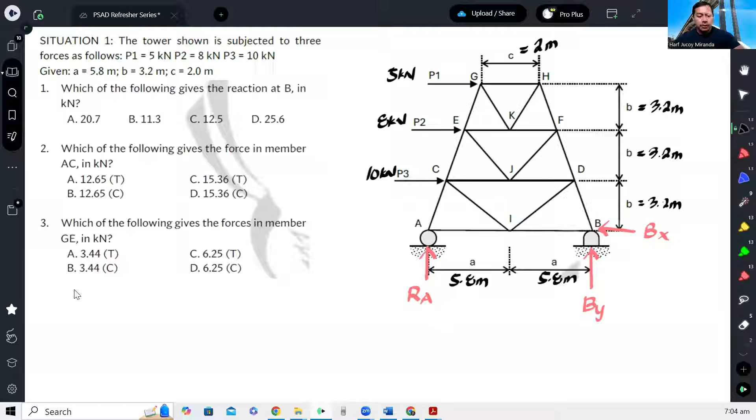Based on the whole structure, we can apply summation of moment at A equal to 0, assuming counterclockwise positive. So from A, we have 10 kilonewtons times B, rotation is clockwise, negative. And then also 8, rotation is clockwise, times 3.2 times 2, that is 6.4. And then we have 5 times 3.2 plus 3.2 plus 3.2, that gives us 9.6.

And then for BX, it has no rotation. For BY, it has rotation counterclockwise. So plus BY times 5.8 plus 5.8, that's 11.6. And that is all equal to 0. From here, we should be able to calculate for BY.

So we have 10 times 3.2 plus 8 times 6.4 plus 5 times 9.6, divided by 11.6. So that gives us a BY of 11.31.

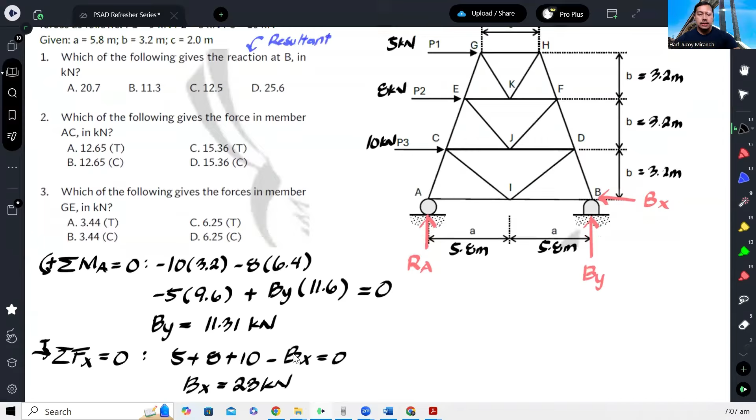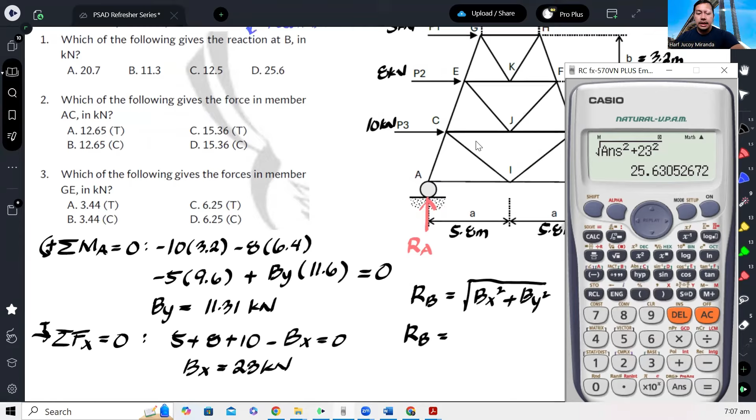So therefore, okay, we can now calculate the reaction at B. The reaction at B will be the resultant. So RB is just the square root of BX squared plus BY squared, and that gives us 25.63 kilonewtons.

Okay, hence the correct answer here is letter D.

Okay, next, which of the following gives the force in member AC? So let's find this. To calculate this, maybe the easiest way is to do method of joints at A. In total, only two members are attached there. Then let's solve first for RA.

So to solve for RA, again, using the whole structure, we will just take summation of forces Y equal to 0, assuming upward positive. So we will have RA plus BY, which is 11.31. BY is positive, meaning our assumption for its direction is correct. And then, I think that's it, nothing else. So therefore, the reaction at A would be negative 11.31 kilonewtons.

Okay, so meaning, our direction is reversed. So either you reverse this or you retain the direction and just keep it negative - either way works. And then from there, we can now apply the joint at A.

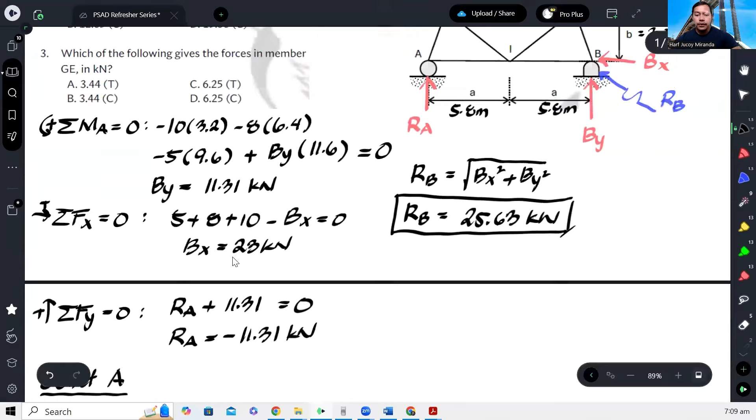So let's isolate the free body diagram of joint A. So this is joint A, it has here reaction RA. Again, I won't change it, but I'll retain it as negative 11.31. And then I'll assume this is tension - this is the force in AI. Then I'll also assume this is tension - this is the force in AC.

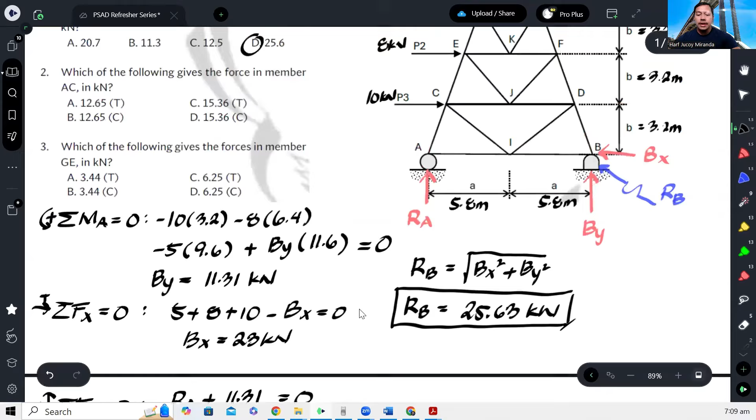So the goal here is to get either the slope or the angle.

So to calculate that, we can make use of this triangle. What I'll do here is just get the slope. To calculate this side, that is basically 5.8 minus half of C - isn't half of C equal to 1? So minus 1, that is just equal to 4.8. Then the height, I think that's pretty obvious, that's just the 3.2 times 3, which is 9.6. So meaning, the slope is 4.8 horizontal, 9.6 vertical. Let's place that here.

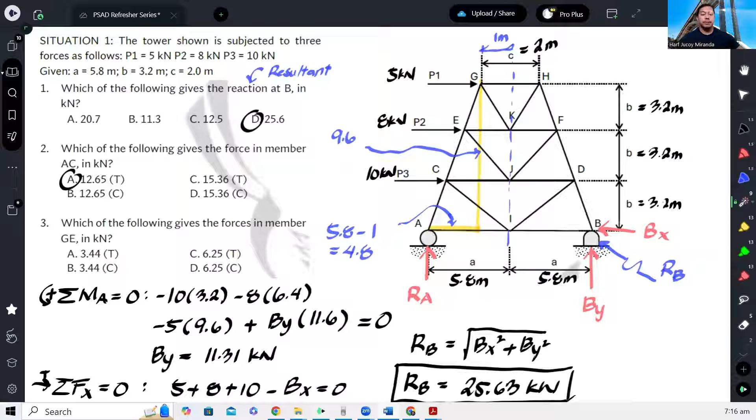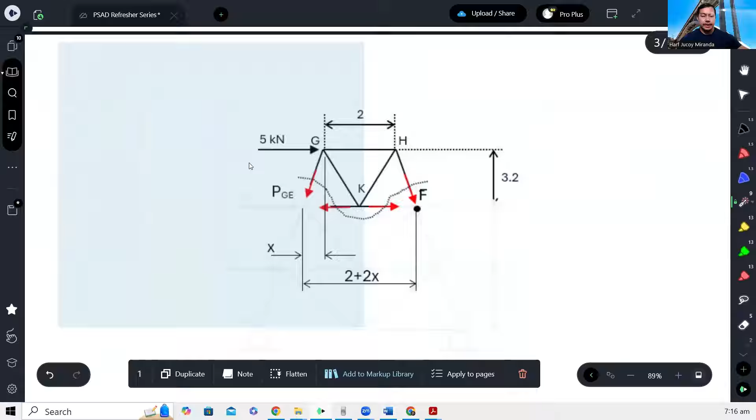So pag ginawa natin ng ganun, we will end up with this. And then i-isolate ko yung ibabaw. Kasi yung ibabaw, mas kakaunti yung mga force. So di ba pag nag-method of section tayo, it's much better to choose the side na konti yung force para hindi masyadong complicated. Okay? And then pagdating dito, we will just take summation of moment at F.

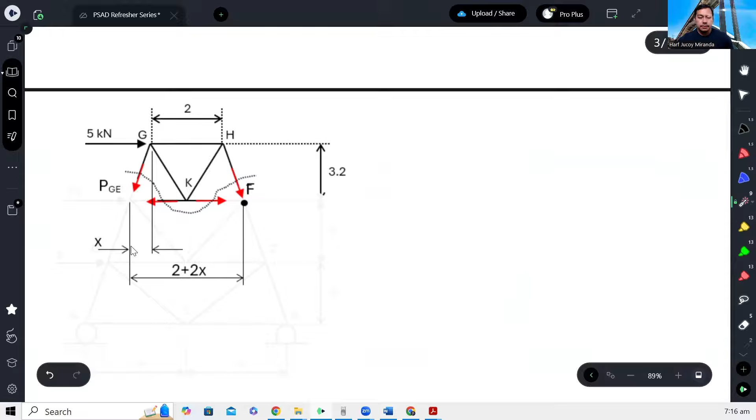But before that, we need to find this length. Kasi kailangan natin, pag nag-moment tayo, kailangan natin ng moment arm nito, no? So wala rin itong dito sa kabila. So kumbaga, ang ibig niya sabihin ganito: itong x na to, tsaka itong x na to, wala.

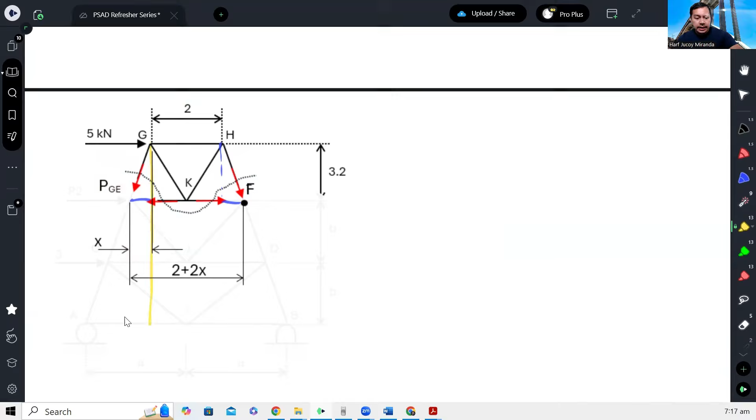So to solve for that, we will apply ratio and proportion, no? Remember from the original figure, meron tayong slope dito kanina. Yung slope dito kanina is 2 is to 1, 1 horizontal, 2 vertical. Okay? So therefore, we can just apply that and then take the ratio naman dito. So ito ay x, as ito ay 3.2. So therefore, we will have x is to 3.2, that's horizontal, vertical. And then, para sa malaking triangle, we have 1 is to 2. So therefore, x gives us 1.6.

Okay, and then dahil meron ka na ng x, magkakaroon na tayo ng moment arm para kay GE. Dito kay GE, meron kang dalawang option. Pwede mo siyang i-retain dito, andyan yung force, so kapag nandyan yung force, meron kang horizontal component tsaka vertical component. Na kapag nandyan mo nilagay yung force, yung vertical component iikot, magkakaroon ng moment. Yung horizontal component iikot din, magkakaroon din ng moment sa F.

Okay, an alternative is pwede mo siyang ilipat dito instead. Okay, pag dyan mo siya nilipat, di ba? According to principle of transmissibility, pwede yun. Yung downward force niya, tsaka yung horizontal force niya - yung downward force niya, iikot pa rin, pero yung horizontal force niya, hindi na iikot kasi dadaan na siya dun sa point of rotation natin. And that's what I'm going to do to simplify the calculation, no? So ang meron na lang na component na iikot, ito na lang.

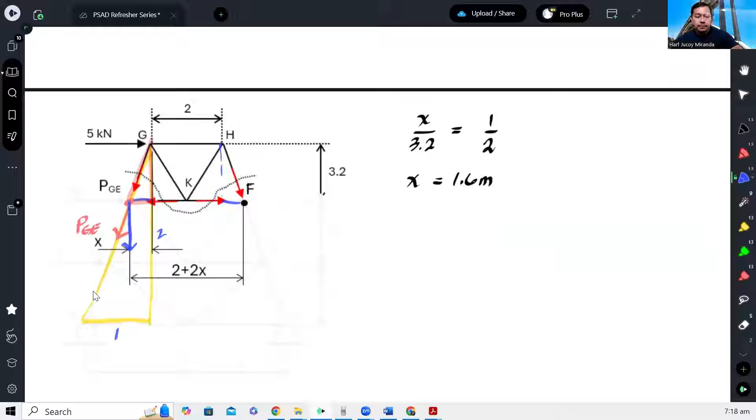Ay horizontal, yung vertical component. Tapos ang moment arm mo ito. Okay, so let's take summation of moment at F is equal to 0, assuming counterclockwise positive. We will have, unahin ko na itong 5. 5 kilonewton, ang moment arm mo ay 3.2. Ang rotation niyan ay clockwise. And then yung Y component ng PGE.

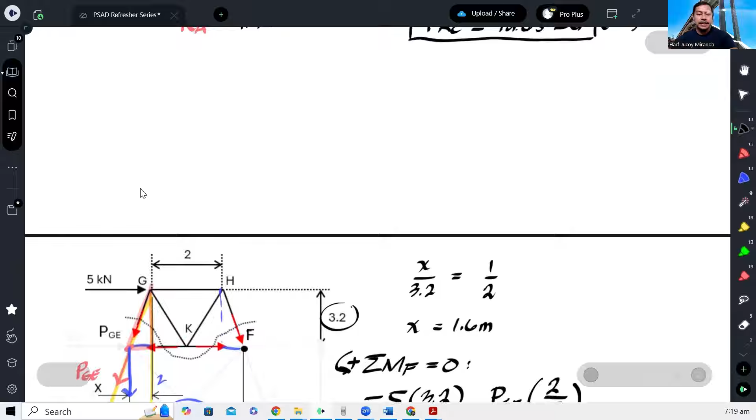PGE, ang Y component niya ay 2 is to square root of 5. Okay, di ba? Yung slope niyan, same lang dito kanina. Okay, and then the moment arm will be 2 plus 2x, 2 plus 2 times 1.6. Ayan. Okay, and then ang rotation na ipoproduce nito will be counterclockwise. Okay, and that is all equal to 0. Wala na namang ibang force.

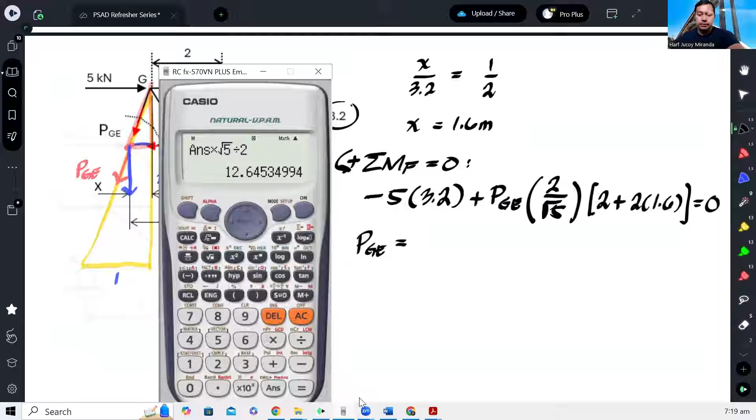And then from here, we should be able to calculate the force at GE. So we have 5 times 3.2, over square root of 5, times 2 plus 2 times 1.6, that's divided by 2. Okay, so the force at GE, sorry, 3.2 pala to, not 3.5.

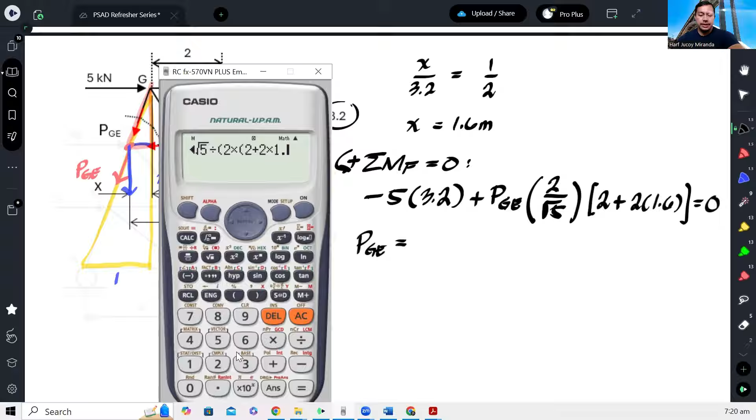Hold on, mali. Ano pala to dapat? Pag tinranspose, cross-multiply pala yung square root of 5. So ulit: 5 times 3.2, tapos cross-multiply square root of 5, tapos divide 2 times 2 plus 2 times 1.6. Ayan, should be 3.44 kilonewtons. And dahil positive, this is under tension.

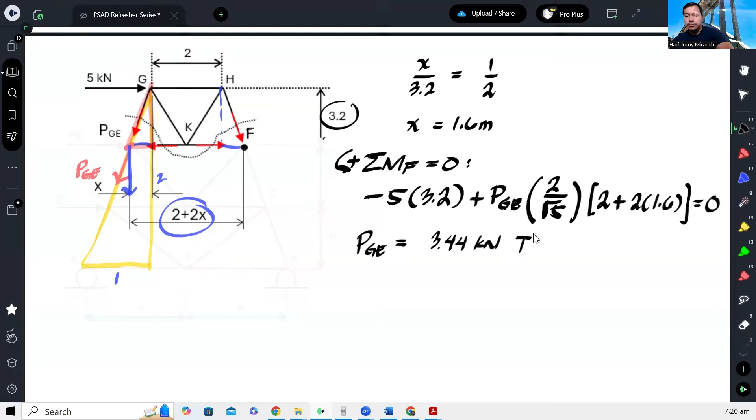Okay, and our answer would be letter A. All right, so that's how you solve this problem.